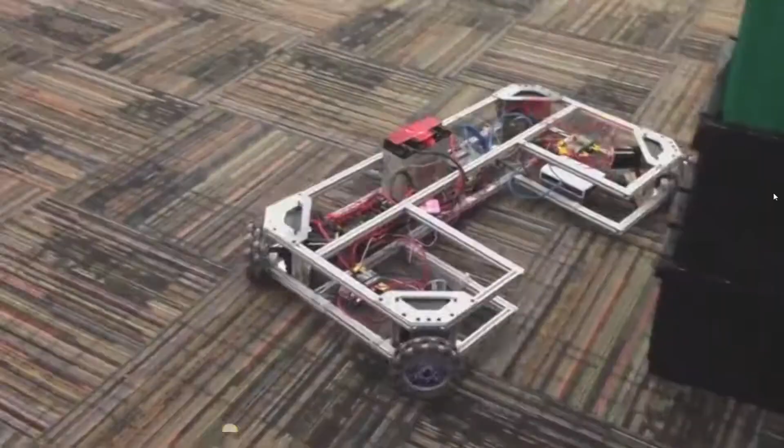In this episode, we are going to use Copy with Mates to quickly push our corner assembly to each corner. This is a quick way to insert parts or sub-assemblies that share similar mates. Click the link below to download the necessary files to follow along with the tutorials.

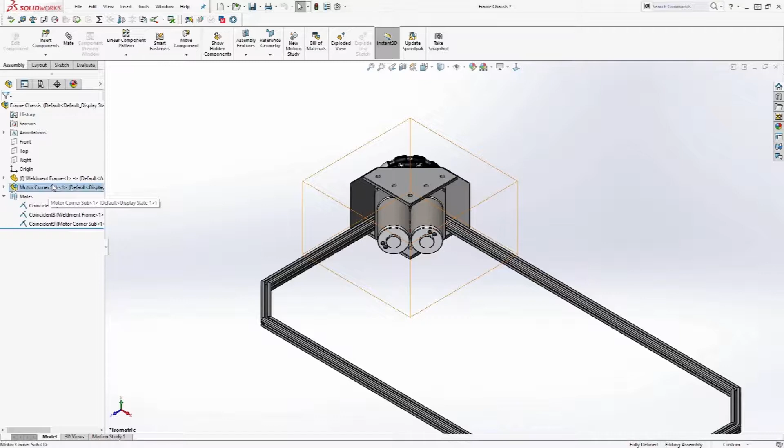I need to add this motor corner to the remaining 3 corners. To do this, I'll use Copy with Mates. I right-click on the motor corner sub and select Copy with Mates because I want to make all corners identical.

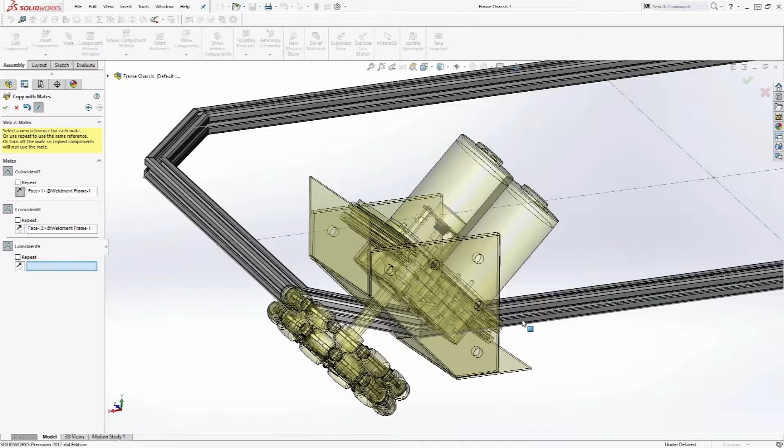This tool displays mates that are associated with the model. In this case, I use 2 coincident mates to align the corner gussets to the weldment outer faces. I also define the corner gusset as coincident to the top plane.

This is going to be true for all motor corners, so we can use the option Repeat. Rotate the view and apply the final 2 copies.

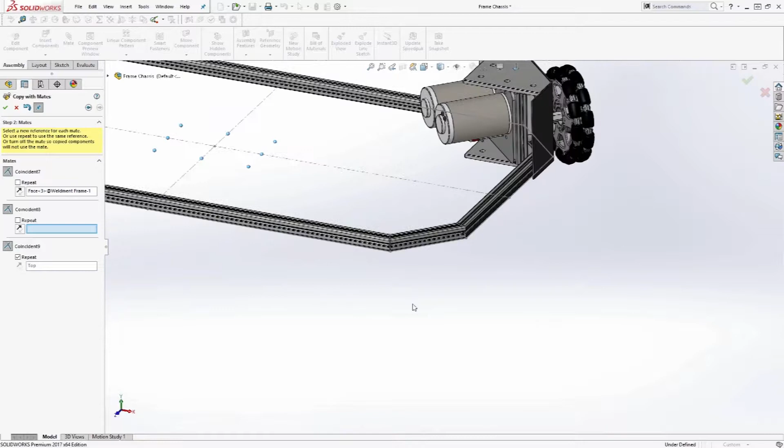Select the left outer face of the weldment. The orientation needs to be flipped, so I click Reverse Direction. Then select the right outer face. The last coincident relationship will be set to Repeat.

Click OK. Close the dialog.

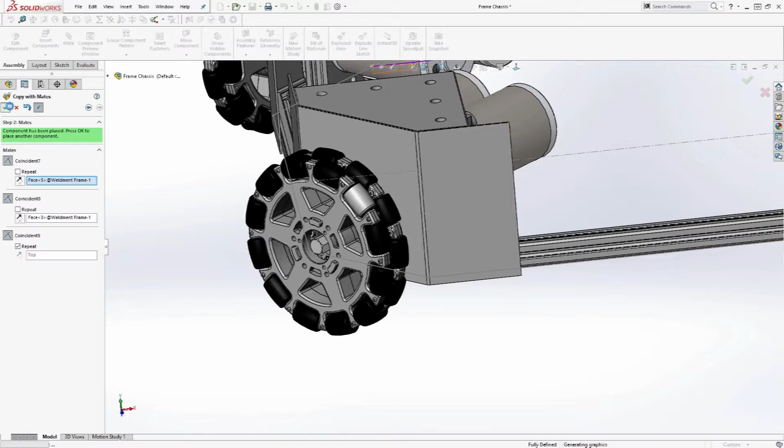Now we have all 4 motor corners applied. Using Copy with Mates is a time saver. We added our final 3 corner assemblies in just a few clicks.